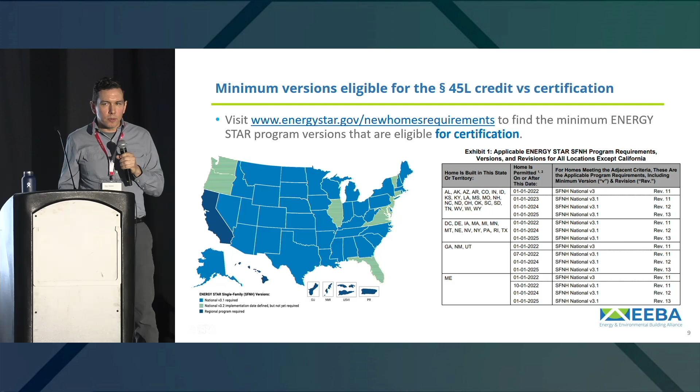Only 9 states, in fact, have an implementation date defined for National Version 3.2.

So, builders may find that the requirements for 45L are too stringent, saying that they're just not ready to step up to National Version 3.2 right now.

They may still be able to certify the homes to a lesser version because of our program requirements. And they should consider that, because there are lots of benefits to certification even if you're not getting the tax credit, like a market advantage, meeting corporate sustainability goals, or in a lot of cases these days, local utility incentives.

For, say, National 3.1. So that's a really important thing to distinguish, and I want you to leave with a clear understanding about the difference between the two.

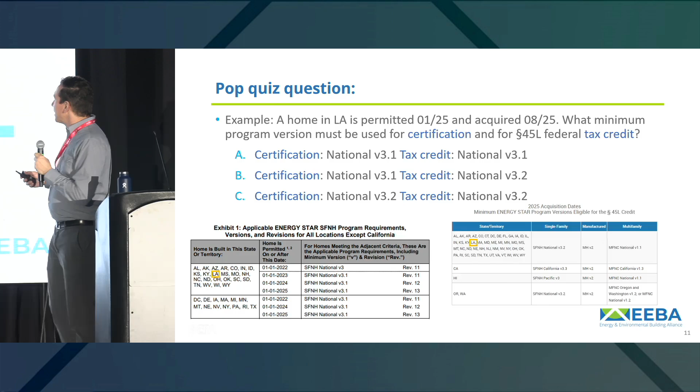Okay, so time for a pop quiz—one, to see if there's anyone still in the room since I'm blinded. So the question: let's say we have a home in Louisiana. It is permitted on January 1st of 2025. It's going to be acquired later that year, in August of 2025.

What's the minimum program version that has to be used for certification? And then what's the minimum program version that has to be used if you want the tax credit? Is it A, National Version 3.1 for certification and National Version 3.1 for the tax credit? Is it B, 3.1 for certification but 3.2 for the tax credit? Or is it C, version 3.2 for both certification and the tax credit?

I have a little cheat sheet, if you can read this, because I don't expect you to memorize all of our tables. On the left is the minimum version required for certification, and on the right is the table we were just looking at for the tax credit for acquisitions in 2025.

So who votes A? Okay. Who votes B? Excellent. And who votes C? Okay, I'm going to give everyone the benefit of the doubt that you guessed B. Looks like you got that right.

Again, some partners have been getting confused and tripped up about this point, so that's why I wanted to drive it home.

Now, I mentioned that we're getting very popular these days, so I just wanted to give you a quick update on participation. Our numbers have been growing the last couple of years, even before the tax credit came into existence.

But in 2023, the first year it went into effect under the new structure, we actually were close to certifying 200,000 homes in the ENERGY STAR program that year alone.

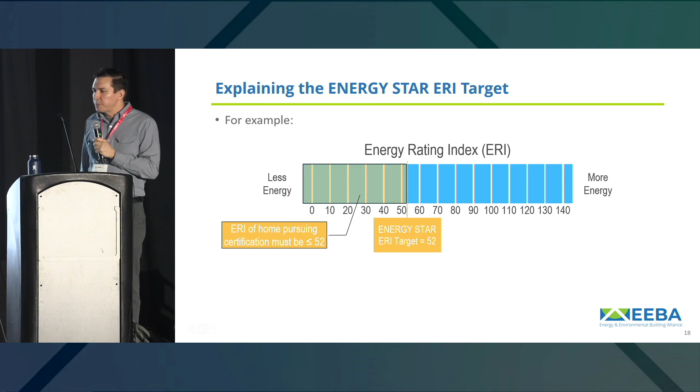The rating software then calculates the ERI score of that target home configured with those efficiency features, and that becomes the target that the builder can then mix and match to their heart's content until they meet or beat that target. So let's say you're modeling a home, you put it into software, you want to certify it, and it spits out for that particular house a target of 52. Then you have to mix and match upgrades until you meet or beat 52 using any features you'd like. None of the ENERGY STAR reference design features are mandatory, but if you don't use them, you'll have to pick other features instead to offset that until you hit the target.

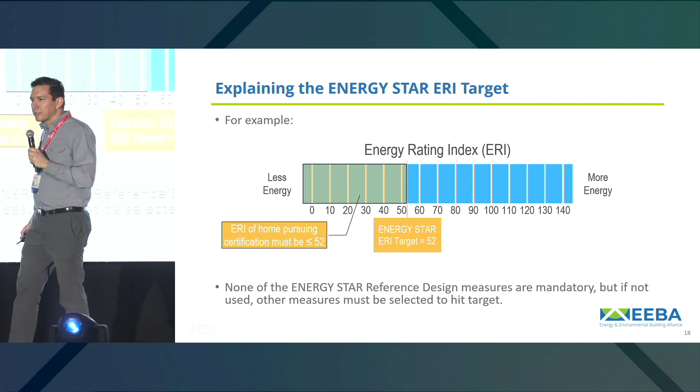So what are those targets? Well, that depends on the program version. National version 3.1, which is used in most parts of the country, the target is generally 55 to 65 for most homes. National 3.2 is being implemented in states that have adopted the 2021 IECC or an equally rigorous code. And as we discussed earlier, the tax credit is also going to require national 3.2 in most states beginning in 2025. So as more states adopt more rigorous codes, you'll see the expansion of national 3.2 just for certification, and if you want the tax credit, you're fast going to become friends with national 3.2—that's right around the corner. For national 3.2, the range is about 45 to 55 for most homes. There are some different performance targets defined in California, Pacific, and the Caribbean—that's my caveat there.

So what is going into that target of 45 to 55? Let's look at the envelope measures that go into the ENERGY STAR reference design for national 3.2. Those are shown on the screen. The cells highlighted in green are those that are an improvement over the 2021 IECC. We start off with an enclosure that's aligned with the prescriptive path of the 2021 IECC with insulation that's properly installed. We are configuring the homes with the ENERGY STAR product spec for windows and doors that was in effect at the time we were designing national 3.2.

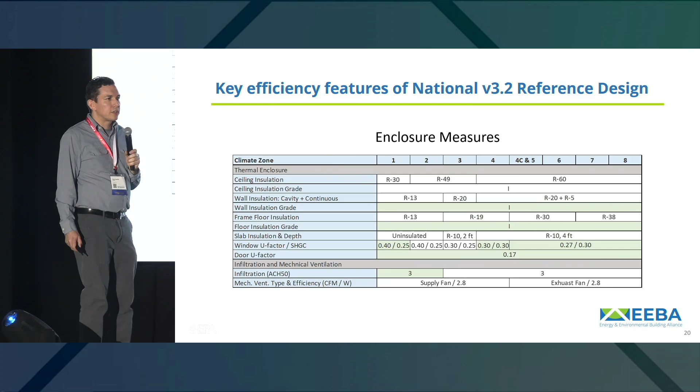All of the locations, all climate zones have 3 ACH50 infiltration, and we have a basic ventilation system, supply or exhaust, in each of those climate zones. Now let's look at the non-enclosure measures.

So we're configuring the ENERGY STAR reference design with the ENERGY STAR product spec for furnaces in most locations, with heat pumps and air conditioners that were basically aligned with the ENERGY STAR product spec for that category, again, when we were developing National 3.2. We have ducts located in conditioned space, 100%. We have a programmable thermostat.

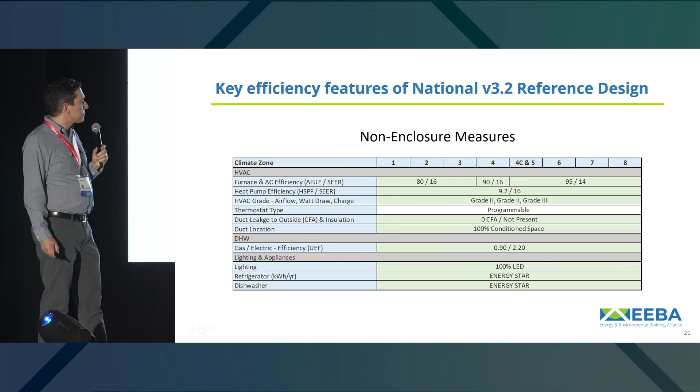We have 100% LED lighting, an ENERGY STAR refrigerator and dishwasher, and we have a high-efficiency water heater. So ENERGY STAR caliber, instant gas, or electric heat pump water heater. So again, that results in a target of about 45 to 55 for most homes.

Again, you don't have to use any of those ENERGY STAR reference design features if you don't want to, but a note of caution is that there are a couple of features that I think you're very likely going to have to use in order to hit that target. That includes the 2021 IECC insulation levels or equivalent. It includes ducts in conditioned space, and it includes an instant gas water heater or a heat pump water heater.

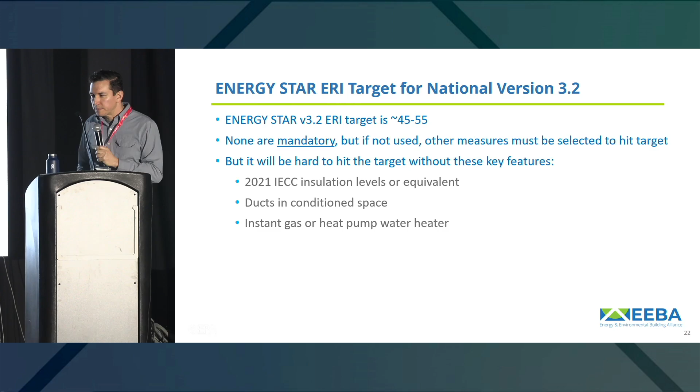So, partners will ask us, how much flexibility do I really have to hit that target and not use efficiency features in the reference design? I want to run through a couple of examples for you. I'm going to start off in a hot climate, climate zone 2. This happens to be a slab-on-grade 2,400 square foot home with electric heating.

And if you put that home into the software, you get a target of 50 for that particular house. And if you configure the rated home with the ENERGY STAR reference design features, lo and behold, you end up with an ERI score that's basically at that target, a score of 49. That makes sense. They're supposed to be sort of one and the same. So that would be a great way to start.

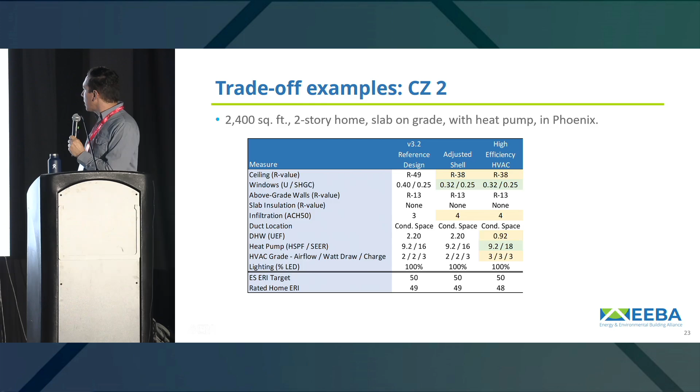Next up, I looked at high efficiency HVAC. And so in this case, I kept the enclosure that we were talking about. I upgraded to 18 SEER, and then I downgraded the water heater to an electric resistance water heater instead of a heat pump water heater. And I also took grade 3 for HVAC grading, so I wasn't even going to assess the HVAC installation. That still got me to a score of 48, so I had room to spare.

Next, I looked at a different water heater. I upgraded to an ENERGY STAR caliber heat pump water heater, 3.3 UEF, and that allowed me to stick with the grade 3 HVAC, stick with 4 ACH50 in that modified enclosure, and I still met the target.

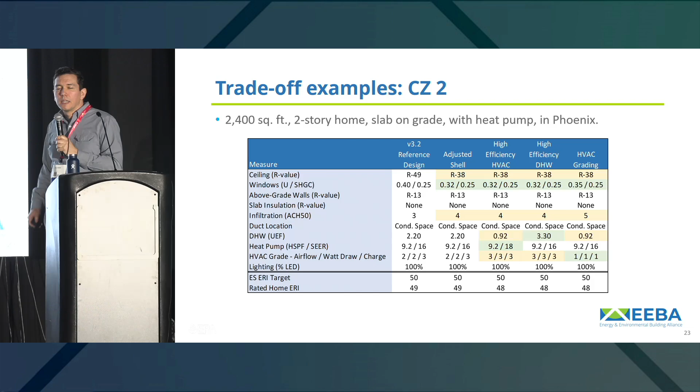And finally, I looked at using HVAC grading. I assumed grade 1 HVAC in this particular case, and that allowed me to back off to that electric resistance water heater, stick with the modified enclosure, and go all the way up to 5 ACH50, and I still hit the target.

So let's move on to a mixed climate, climate zone 4. So now it's a 2-story home, 2,400 square feet. It is a conditioned basement with a gas furnace in Baltimore. Again, if you just start off with the ENERGY STAR reference design features, for this particular house, the target is a 52, and you come in at a 51 for the rated home.

So first, I kind of modified the enclosure. Again, that's an area that most builders are interested in tweaking. And so I went from an R60 down to an R49 in the attic, and I went down to R21 high-density batt in the walls. And then to compensate for those downgrades, I improved the window U-factor down to 0.25.

That worked. So then I built off of that. I increased the infiltration to 3.5 ACH50, so I had a little wiggle room. I took the grade 3 HVAC grading default, and I improved, in this case, the furnace to 95 AFUE, a current ENERGY STAR gas furnace. That worked as well with room to spare.

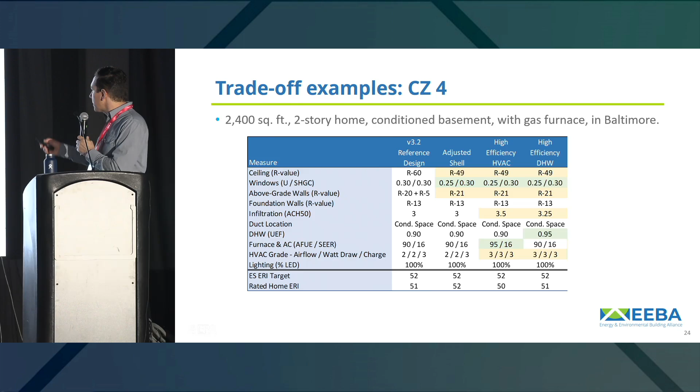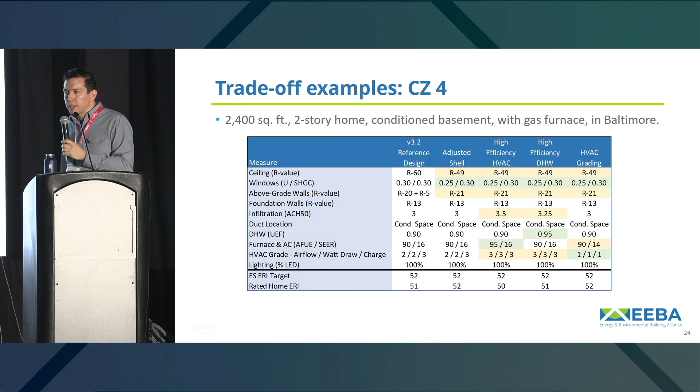Then I upgraded the water heater to an ENERGY STAR caliber water heater instead with that modified enclosure. Still took the grade 3 default for HVAC grading, and I was able to have a little wiggle room on the infiltration. That worked. And finally, I looked at the HVAC grading again, so grade 1. That allowed me to downgrade to a 14 SEER air conditioner and stick with that modified enclosure and still meet the target.

And finally, let me just do a quick cold climate example. So a 2,400 square foot home, 2-story, conditioned basement, gas furnace in St. Paul. Again, with the reference design features, you end up with a score of 49 versus a target of 50, so that works. The adjusted shell was pretty similar to Baltimore, going down to R49 in the attic and R21 in the walls, so no continuous insulation on the walls. You're compensating for that with 0.25 U-factor windows and also upgrading the foundation insulation to R21 in the walls.

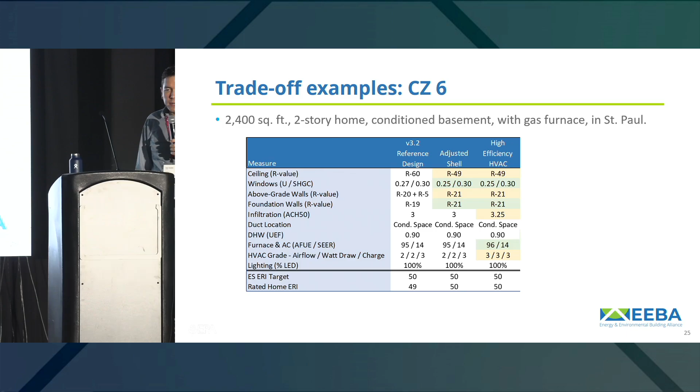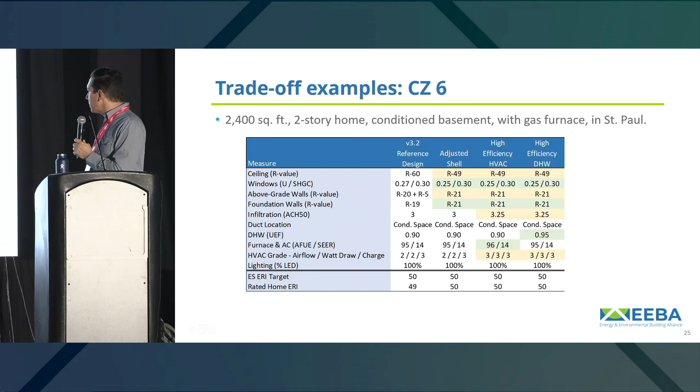Building on that, I went with a 96 AFUE furnace, so just a tweak to the furnace relative to the reference design. That allowed me to back off to default HVAC grading, grade 3, and a little wiggle room on the infiltration. Then I looked at the high efficiency water heater at 0.95. That gave me the ability to stick with grade 3 as well as still have some wiggle room on the infiltration. And finally, I was looking at grade 1 HVAC, and that allowed me to stick with the higher infiltration and the modified enclosure.

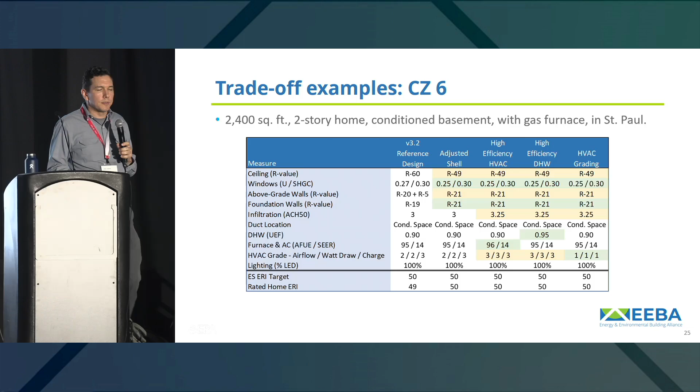So the takeaway here, hopefully, if you haven't done this exercise yet, is that there is a little bit of flexibility to mix and match measures here. You're probably just not going to be deviating in a couple of key areas from the ENERGY STAR reference design, like you're probably not going to be moving the ducts to a vented attic unless you're really going to pull out all the stops to compensate for that. So that's the first key change.

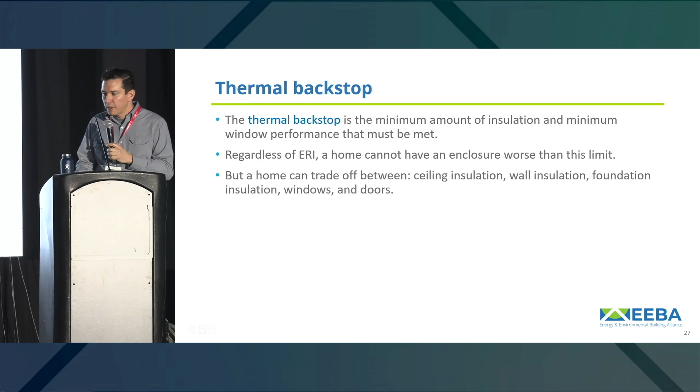The second key change between National 3.1 and National 3.2 is a more stringent thermal backstop. So what do we mean by that? Well, the thermal backstop is the minimum amount of insulation and the minimum window performance that you have to include in the home for it to be certified. So you could have an ERI score of 0, highly efficient, but if you're not meeting the thermal backstop, then you can't certify the home. We've actually always had that in our program, but with National version 3.2, it is more stringent.

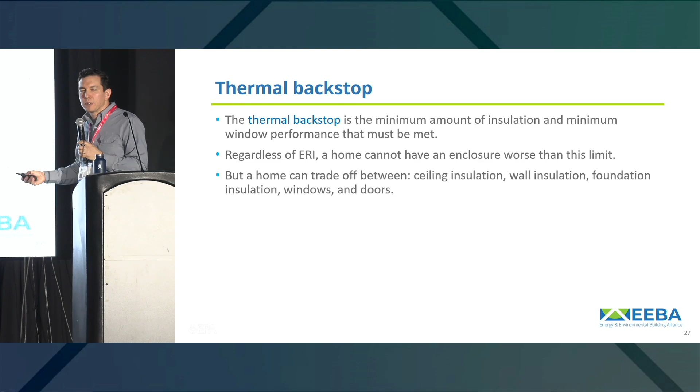And with the thermal backstop, that means that you are allowed to trade off insulation levels between the ceiling, the walls, and the foundation, as well as the windows and doors. But you can't compensate with, say, an 18 SEER air conditioner. Okay, so we can quantify that thermal backstop. It's basically the area-weighted U-factor of the entire enclosure. And you'll often see that described as the building UA value. You're literally multiplying the U-factor of a component by the area of that component.

I know that's a little bit wonky, something that a lot of people don't have intuition on yet, completely understandable. So I just wanted to run you through a couple of quick examples to help build that intuition. I happened to do these calculations on a 2,400 square foot home with a 15% window area to floor area ratio. Your results would vary a little bit if you did a different house type. So I want to start off with windows. When we say UA, you're literally multiplying 0.35 U-factor by 360 square feet of area, and you get the UA value of 126.

And as you improve that window from 0.35 to 0.3 and 0.3 down to 0.25, your UA becomes lower, which is better. Now I just want you to pay attention to how much that UA is changing as you improve that window. It's going down by about 18, which is actually quite a bit because windows are unfortunately relatively poor insulators. So now let's move over to walls. You're doing the exact same calculation. The U-factor of the wall times the area of the wall will give you the UA value. As you improve the insulation, the UA value goes down.

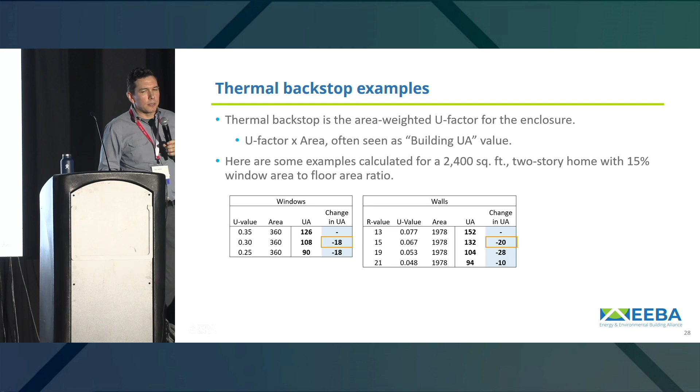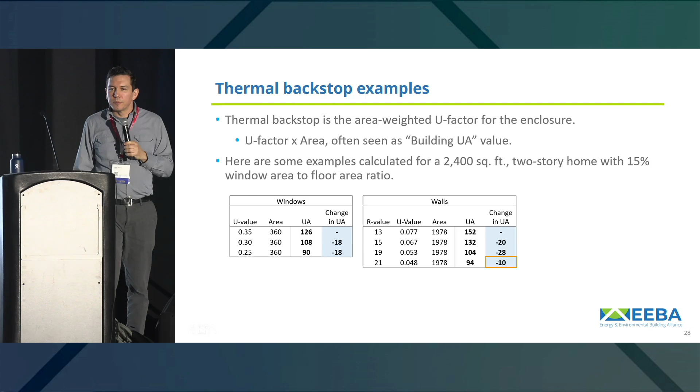I just want you to pay attention to how much that's changing. So improving your walls from R13 to R15 has about the same impact on the UA as improving your windows from 0.35 to 0.3. And I'll also point out that as you go from R19 to R21, the UA value improvement is about half of what you got from going from R13 to R15. So diminishing returns as the insulation level gets higher.

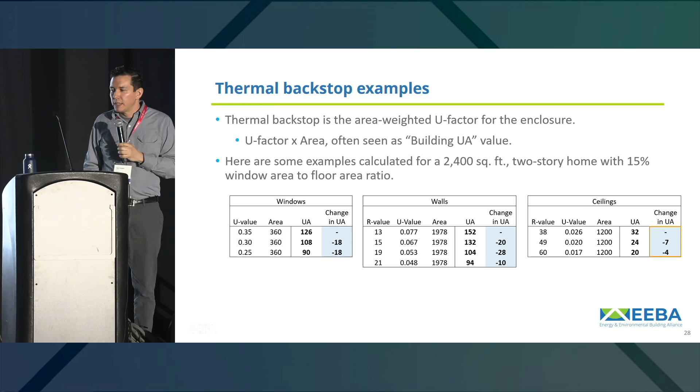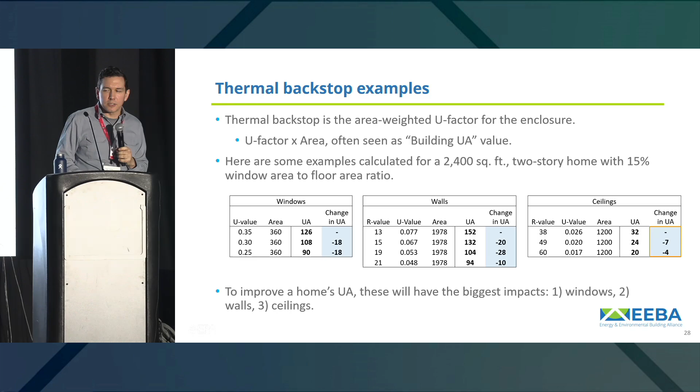And finally, let's look at ceilings, which are relatively highly insulated to begin with. You can see that the change in UA as you improve that insulation level is really quite small. So the key takeaway of this slide, if that was too much in the weeds for you, that is fine. The takeaway here is if you want to improve the UA of your house, you'll get the biggest bang for your buck by starting with the windows and improving those, then the walls, and then the ceiling.

Okay, so what are the thermal backstops for ENERGY STAR? Again, that depends on the version. For National version 3.1, that's in effect in most states in the country, it is 100% of the UA value of the 2009 IECC prescriptive path. And some partners didn't even know that existed because it was so easy to meet.

With National version 3.2, it's more stringent. It's based on the UA value of the 2021 IECC prescriptive path. For homes that are permitted before January 1st of 2025 and certified using National 3.2, it's 105% of that UA value. And then for homes that are permitted on or after January of 2025, it drops down to 100% of that UA value.

Now, if you're not familiar with the requirements in the 2021 IECC prescriptive path, I put those on the screen here, along with the 2009 IECC for comparison. And I've shaded in green the differences. So I would summarize those changes into 3 categories here. So climate zones 1 and 2, I would call modest. Sure, the ceiling insulation is higher. The windows are a little bit better than the 2009 IECC, but it's almost harder to buy windows that are worse than that these days. So that's why I say that's a pretty modest change.

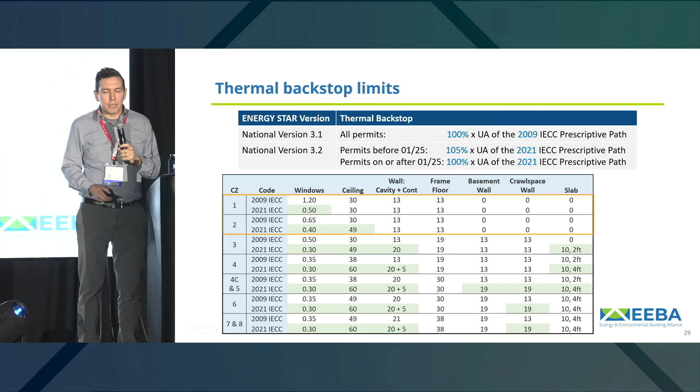The second category is climate zones 5 through 8. I would call that a moderate change. In fact, the 2021 IECC has basically the same insulation requirements in climate zones 5 through 8. It's all identical except for some differences in floor insulation values. So you're going up to R60, which is a big deal, but it's from a relatively high level to begin with. The windows are basically what most of our partners are probably using today anyways. The wall insulation is higher for sure, but it's also starting from a relatively high level of insulation to begin with. And then some modest improvements to the foundation.

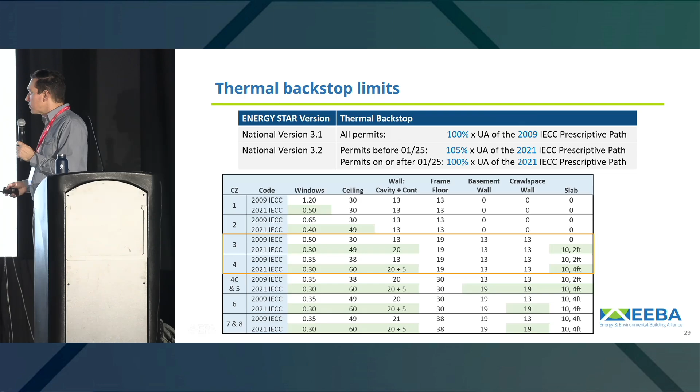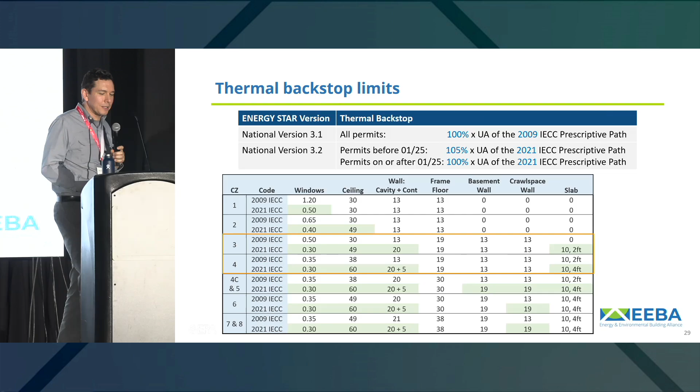And the last category, climate zones 3 and 4, is what I call major. And I call it major because the wall insulation requires a change in assembly type. You're really getting to 2x6 construction there. And slab insulation is introduced for the first time in climate zone 3. So if that's kind of freaking you out, that's okay. We have the UA approach to give you some flexibility. So let me calm your nerves a little bit by talking about those trade-offs.

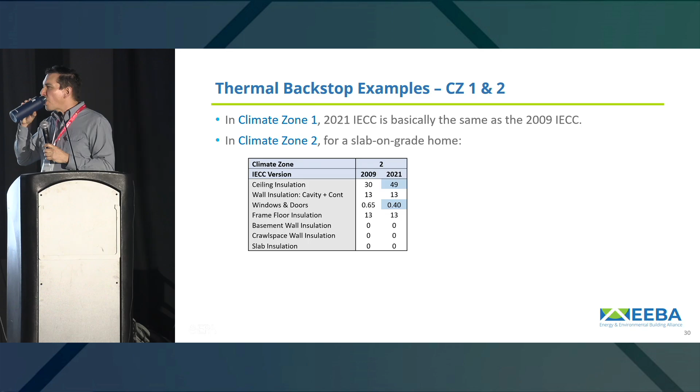So let me give you some examples here. I'm going to start off with that modest group. Climate zone 1, I'm not even going to show you an example because, again, 2021 IECC is, for all intents and purposes, the same as the 2009 IECC. For climate zone 2, the big change, again, is the ceiling insulation, and the windows have gotten a little bit better. So if you can just put those things in, you calculate the UA for the home, you're going to find that it meets the 2021 IECC UA. But let's say that you're not comfortable with that, you want some other options.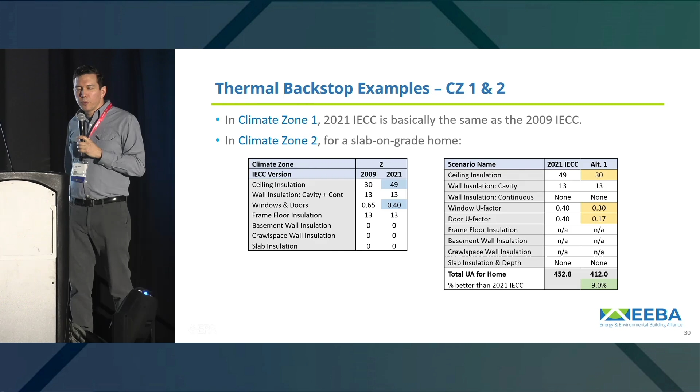So in this case, I downgraded from R49 all the way down to R30. That's a big change. And to compensate for that, I improved the windows from 0.4 to 0.3, and I added insulated doors. And you see the UA value down there is not just meeting the 2021 IECC, it's exceeding it by 9%. It's 9% better. So you can see that on the left, it's 452.8. You end up with 412 on the right. It's lower, it's better. So you got room to spare there. So lots of flexibility.

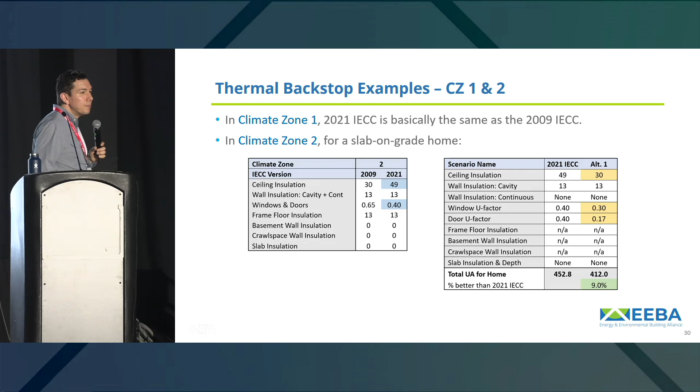That's why I say I don't think most partners are going to have challenges meeting the backstop at climate zone 1 and 2. Okay, let's move on to the moderates category.

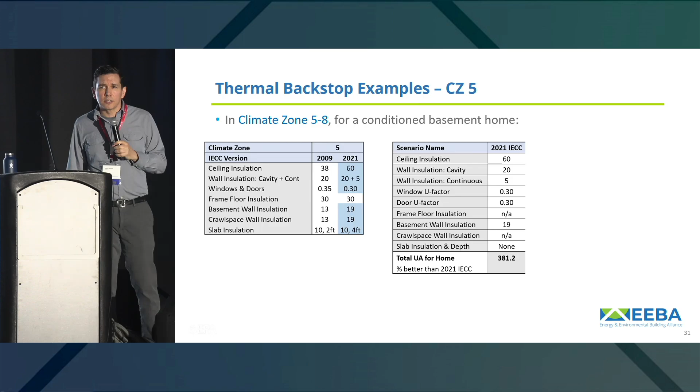I'm going to use climate zone 5 as an example, representative of 5 through 8. Changes almost across the board: ceiling insulation, wall insulation, window improvement, and foundation insulation improvement. So again, you could just go with that and you'd be good to go, right? That's going to meet the UA target by default.

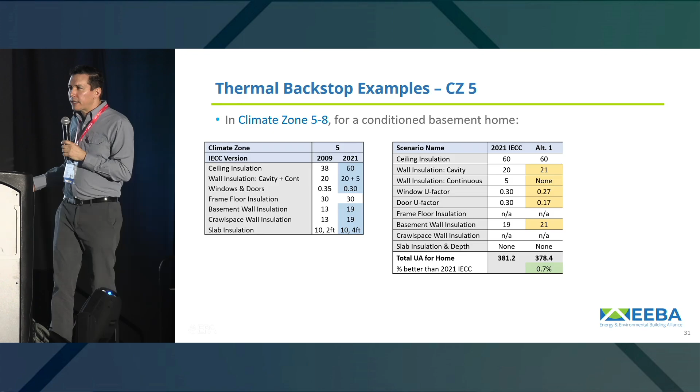But let's say you want some other options. Let's say that you don't want to use continuous insulation on your walls—that's something we hear a lot from builders. So I'm going to just go with a high density batt in the wall cavity, R21, and skip the continuous wall insulation. To compensate, I'm going to improve the window U factor modestly to 0.27. I'm going to use insulated doors, and I'm going to use that same high-density batt in the foundation. That also allows you to squeak by without any continuous insulation on the walls.

Okay, well, let's say that R60 is a step too far. You want to drop back down to R49, but you're willing to max out the cavity insulation to R23. So no continuous insulation on the walls, but you're packing the 2x6 wall with insulation. You apply the same window and door upgrade, and you get there as well.

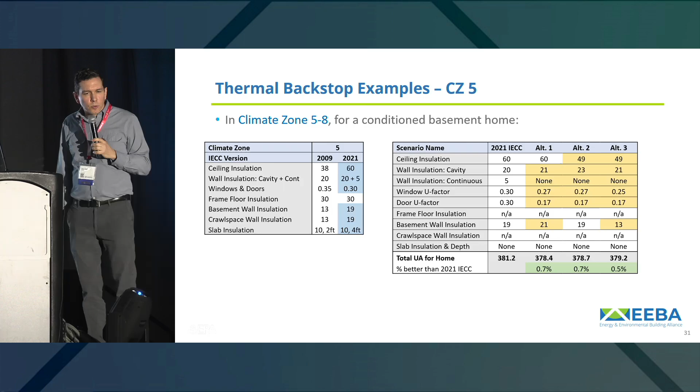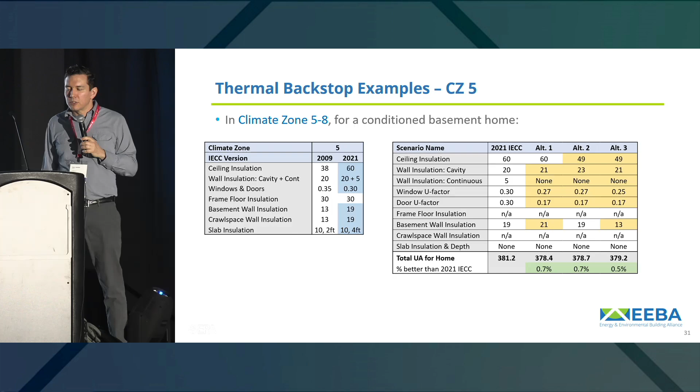And then finally, let's say that you invest in a really good U-factor window—you go down to 0.25. What does that give you in terms of flexibility? You can stick with R49 in the ceiling, which is pretty conventional in the north these days. You can stick with R21 batts in the wall, and you can actually downgrade your foundation wall insulation to R13, and you still hit the target. So you can see how powerful that good window is in meeting this.

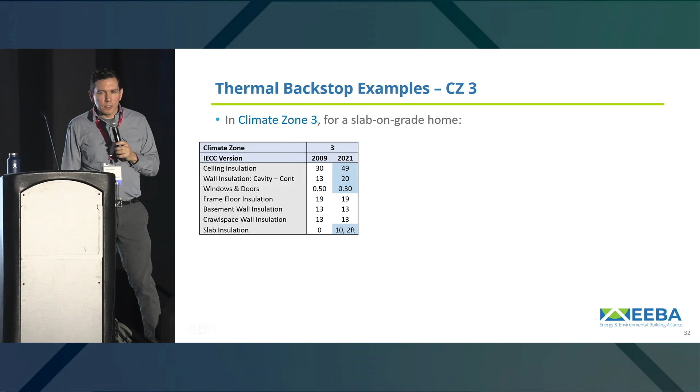Okay, let's move on to the most difficult category. Start with climate zone 3. I modeled a slab-on-grade home. Here's where you have an increase in the ceiling insulation, a change in the wall assembly, and a change in the slab insulation. Again, if you do that, kudos to you, you're good to go.

Let's say that you can stick with the R49, but you don't want to go to 2x6. So one alternative that we've seen taking off in Climate Zone 3, like in Dallas, for example, is sticking with the 2x4 wall with a high-density batt, but adding a little bit of continuous insulation, R3. If you pair that with a modest improvement to your window U factor, 0.28, and insulated doors, you can put in just a little bit of slab insulation and hit the target. So that would be one way to go.

Let's say instead you're willing to go to 2x6 and you put in a high-density batt. You stick with R49 in the ceiling. You can have an even smaller improvement to the window, and you can get rid of the slab insulation altogether, and you'll also be good.

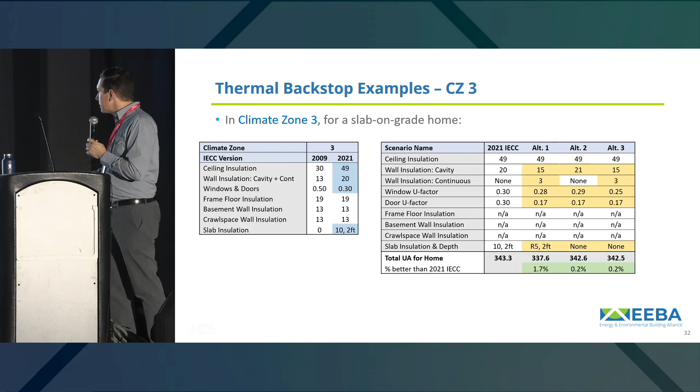Or let's look at the window example again. Let's say that you're willing to invest in 0.25 U factor windows. That allows you to go back to the 2x4 assembly with a little bit of continuous insulation and no slab insulation at all, and you can still hit the UA target.

And finally, let's look at Climate Zone 4. Slabs and basements are common there. I went with a slab example because that tends to be a little bit harder to hit the UA target. So again, improvements to the ceiling insulation, the wall insulation, the windows, and a little bit of a tick up in the slab insulation. If you can do that, you're good to go.

Let's say you're willing to stick with the R60, but you don't want to do continuous insulation. Well, if you max out that wall cavity at R23, and you make a modest improvement in your windows, then you're good to go.

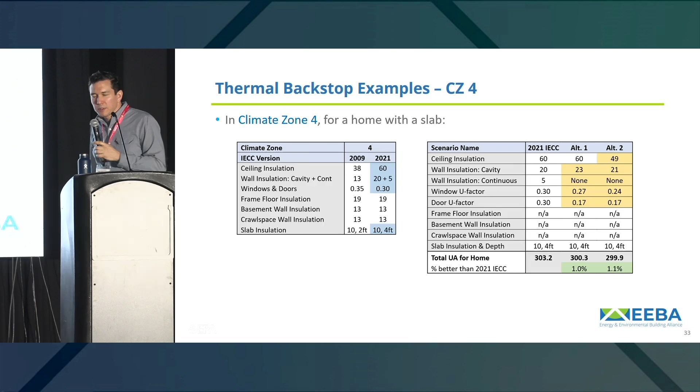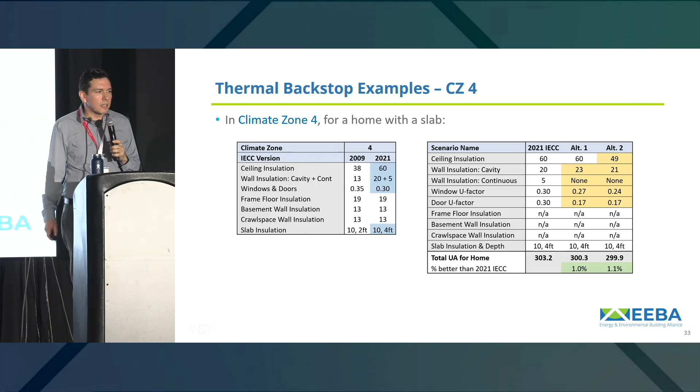Next, if you want to stick with R49, if R60 is just a step too far, then you can do that. You want to stick with R21 in the walls, okay? Well, then if you really double down on those window U factors, in this case down to 0.24, that would also allow you to hit the target.

So with most of these examples, I ended my scenarios with an improved window U factor. And I think while these may be sort of uncommon today in terms of your experience as a builder or rater, we think these sorts of products are going to become a lot more common in the next few years. That's because there's a new specification that came out last October for ENERGY STAR residential windows, doors, and skylights.

The reason I think that is a big deal is that back in 2020, the last year we have market data, 84% of windows sold in the United States, not just residential new construction but existing market as well, were ENERGY STAR certified. So window manufacturers were largely lining up to meet that ENERGY STAR product spec.

Now this new spec is much more stringent, but I expect the industry to slowly follow suit with more offerings that meet these new requirements. This is the new product spec as of last October. I'll call out two regions: the yellow region is basically Climate Zone 4, where a window with a U factor of 0.25 or better is required to be labeled ENERGY STAR. In the northern half of the country, the blue region, you're required to have a U factor of 0.22 to 0.26, depending on solar heat gain, for that product to be ENERGY STAR labeled. So the whole industry is slowly gearing up to have more offerings around this.

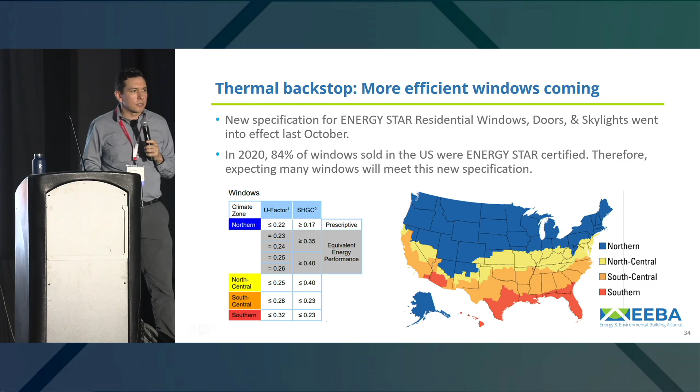In fact, we've been talking with our product expert at ENERGY STAR on Windows, and he educated me. He said you can get down to 0.24 and 0.25 U factor with off-the-shelf technologies and a double pane assembly. So we're not asking for triple pane in the scenarios I was looking at, though if you're interested in triple panes, I think those will become even more common and affordable. There was a great pre-conference session yesterday between window manufacturers and builders about the need for more high-performance window products.

Okay, let's do a quick knowledge test. What's the key difference between National 3.1 and National 3.2? Is it a more stringent ERI target? Is it a more stringent ERI target and a new thermal backstop? Or is it battery storage in every home? A, B, and C—who's going to be the wiseacre? Yeah, pretty compliant crowd. All right, very good.

What's the typical range of ERI targets for National 3.2? Is it about 0 to 10 for every house? Is it exactly 50 for every home, or is it about 45 to 55? A, B, C. Very good. I wish I could hand out gold stickers or gold stars or coffee or something for getting that right. And last question.

Which homes have to meet a thermal backstop equal to 100% of the 2021 IECC UA? This is a bit of a trickier question. All homes certified to National 3.2? All homes certified to 3.2 if permitted after January 1st, 2025? Or is it all homes, regardless of the version certified under, if permitted after January 2025? So A, B, and then C.

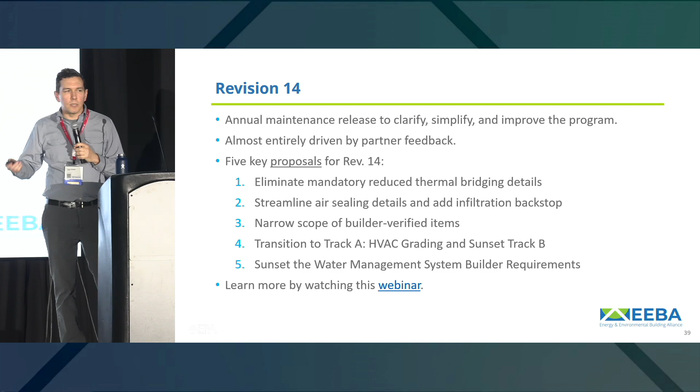If you didn't hear about this and want to learn more, you can watch a webinar at this link when you get the slides. This goes into a lot more detail. Again, we solicited feedback over the summer about these proposals. We're now processing all that feedback we got from partners, and we'll decide whether to proceed with each of these 5 proposals. That will show up in the form of Rev 14 when we release it, aiming for the end of the year.

Moving on, National Version 3.3. So yes, we are in fact working on the next national version of the program. Why would we do that to ourselves and to you? It's because the 2024 IECC has been finalized and published, and that is more stringent than the 2021 IECC from a casual read. So we are now working on the next national version of our program. The key goal is to maintain 10% savings or more relative to that latest model code. We are expecting a comment period later this fall on that proposal, and we anticipate that will be finalized by the end of this calendar year. It's worth noting that the earliest that could go into effect for certification, the earliest we'd require that to be used for certification in a state, would be January of 2027.

So a little ways off before you have to even contemplate making use of it. First, we have to finalize it, but that is something we're actively working on back at headquarters.

And finally, for our California partners, we are also working on the next regional version of the program in that state. That's in response to their just finalized 2025 edition of the California State Code. We're actually kicking off a comment period next week on that, again, to maintain 10% savings above the latest code. The good news for our builder partners in California is that the efficiency features of the code have more or less leveled off at this point, and the state has turned their attention more to the electrification side of things. So in terms of energy efficiency, we anticipate this new version is going to have roughly the same stringency as the prior version. And again, we're starting a comment period next week, and the earliest possible that could be required for certification would also be January of 2027.

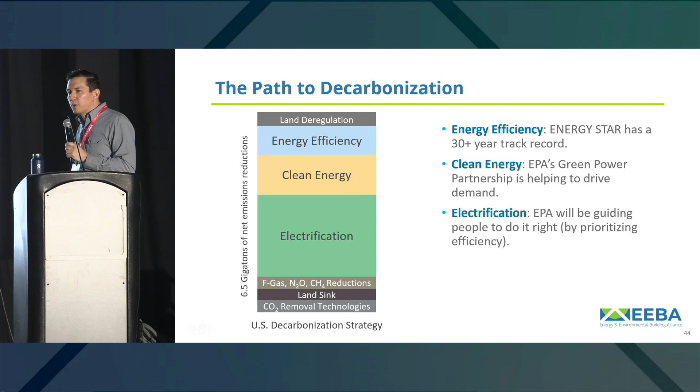So let me start with a little bit of context. As you probably know, underlying all of the ENERGY STAR program is our goal to reduce greenhouse gases. If you talk to experts about how to continue making progress on those goals—for example, the Department of State's long-term strategy for greenhouse gas reductions—it really comes down to 3 strategies for making the most impact: energy efficiency, clean energy, and electrification. With ENERGY STAR, historically speaking, we focused on that first one, energy efficiency. With ENERGY STAR NextGen, for the first time, we're introducing elements of electrification into the program to continue advancing our environmental goals.

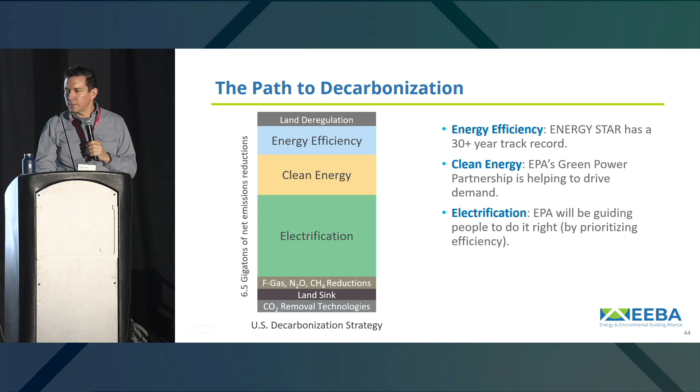And the reason electrification is so important is because electricity is getting cleaner every year. Renewable energy generation has just about doubled in the last dozen years, and the Energy Information Administration expects renewable energy to increase 5-fold in the next few decades. As a result, electricity has already started to become much more efficient, largely driven by changes in policy at the local, state, and federal level. For example, the Inflation Reduction Act, passed between 2022 and 2023, caused a difference in projections in the annual energy outlook produced by the Energy Information Administration—dropping the projected emissions rate of electricity by nearly 50% from that policy change alone. So again, there are lots of policies driving electricity to be cleaner and cleaner going forward.

Okay, so for ENERGY STAR NextGen, the program builds on the successful foundation that ENERGY STAR created, our core program. It helps define the key elements and technologies needed in new homes and apartments to drive emissions down significantly, all in a national platform.

We believe that we have a really important role to play in that process as ENERGY STAR, to help everyone do it in an effective, meaningful way and continue to deliver the benefits that consumers have expected from our program all along. So not just energy efficiency, but also comfort, durability, and indoor air quality.

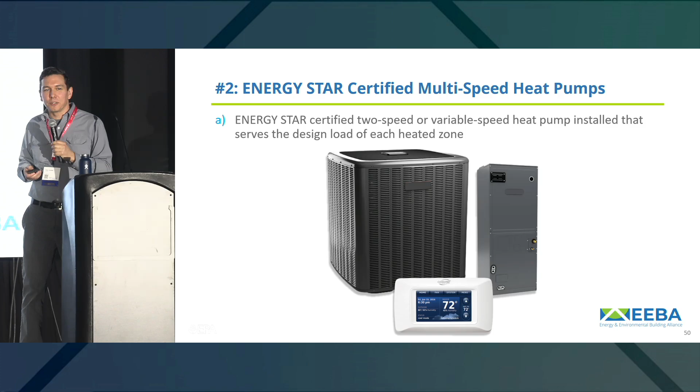Now, multi-stage and variable speed technology is a really important amenity. It's not just unlocking higher efficiency, but it's also offering things like more consistent temperatures throughout the home, and these systems typically operate more quietly. As someone who lives in a house where the return is right next to my head in the living room, I can tell you that that quietness is something you can definitely market to homeowners. So we think that's pretty great.

There are a couple other components that go along with this heat pump. The first is that if you're installing this in climate zone 5 through 8, that heat pump also has to meet EPA's cold climate criteria. That basically ensures the heat pump is going to deliver the sufficient amount of heating, and at an efficiency you'd expect, at very low outdoor temperatures typical of those climate zones. Now, you may not know this if you haven't been following heat pump technology, but heat pumps have been installed in cold climates in the US for at least the last decade, if not longer.

We pulled out some quotes here from Efficiency Maine. They were asking for customer testimonials from a retrofit project where they were putting heat pumps into existing homes in Maine, and the customers had a really great experience. They maintained their comfort and lowered their utility bills, even during a brutal cold snap in the middle of winter. So this technology works, it's being used today, and it can be used in ENERGY STAR NextGen quite successfully. You don't have to entirely take our word for it, though.

That's because we allow dual fuel systems in ENERGY STAR NextGen. The primary heating and cooling system has to be a heat pump, but you are allowed to put a gas furnace backup or other non-electric backup in and still certify the house.

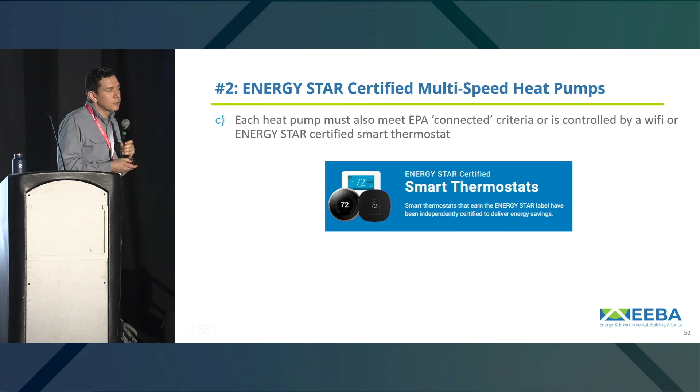The next component that goes along with the air source heat pump requirement is that they have to meet EPA's connected criteria, or be controlled by a Wi-Fi enabled thermostat, like an ENERGY STAR smart thermostat. For a 2-stage heat pump, that's a great option. For a variable speed heat pump, you often need to pair that with an OEM or manufacturer-specific controller to enable all the functionality of that sophisticated equipment. So that might be a case where you default to just a Wi-Fi enabled thermostat to satisfy this requirement.

And the web presentation wouldn't be complete without mentioning HVAC grading. That's the fourth component of air source heat pumps: you have to properly install these systems, meaning Grade 1 HVAC grading per ANSI/RESNET/ACCA/ICC 310, the HVAC grading standard. If you're not aware of that standard, I'm surprised, but it's something I've been talking about ad nauseum for the last 5 years or more.

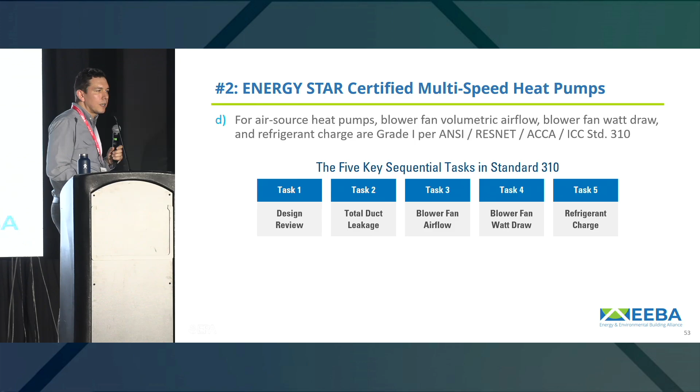It's 5 tasks completed in sequence: a design review and a total duct leakage test, which our partners are basically doing today anyway, and then 3 relatively new field tasks—measuring the total airflow through the HVAC system, the blower fan watt draw, and assessing the refrigerant charge. Just doing those 5 tasks gives you a wealth of information about how the system has been installed, and makes sure you're reducing risk to the builder and that they're really getting what they paid for.

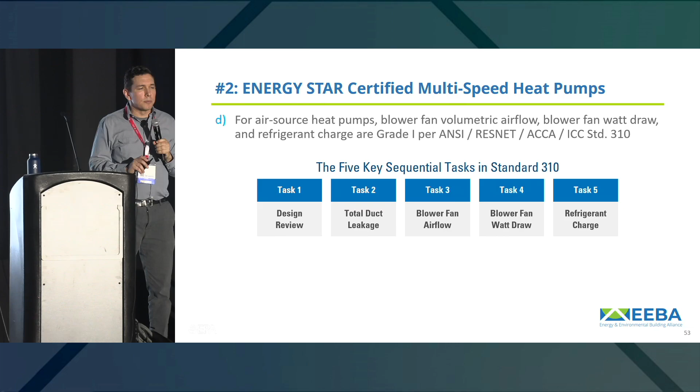So this is a really important component of NextGen. We like to say that ENERGY STAR NextGen homes and apartments allow you to take control of your comfort with a quiet and responsive heating and cooling system. We think this is a really marketable feature for homeowners, and we think it's catching on.

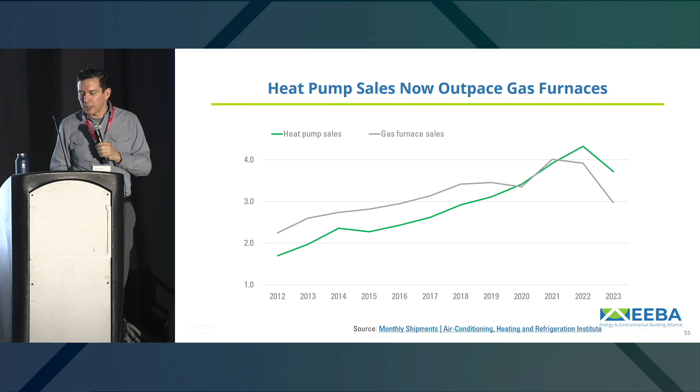So this is pretty fascinating. In 2022, for the first time, the sales of heat pumps outpaced the sales of gas furnaces in the US. That only accelerated in 2023. I was looking at the numbers before the conference, and that's continuing into 2024 as well. So we think that's a really compelling value message.

Okay, on to the next requirement: an ENERGY STAR certified heat pump water heater that meets EPA's connected criteria. Heat pump water heaters, if you haven't heard, can be up to 4 times as efficient as standard electric technology. They can save homeowners hundreds of dollars per year, and they're really amazing technology to reduce one of the biggest end uses in a home.

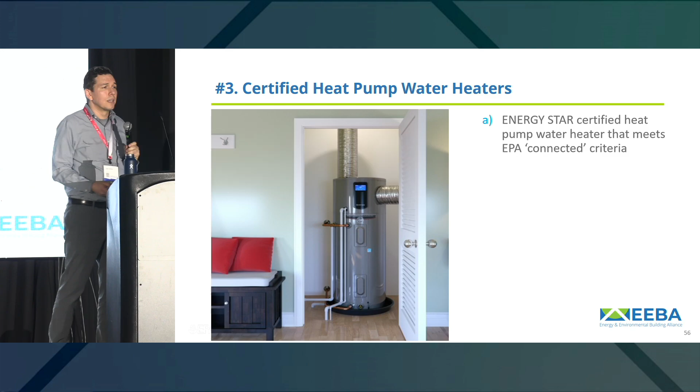Now, the small and mighty ENERGY STAR team back at home has installed 3 or 4 of these in our own houses. We've had great luck—they produce enough hot water, they're quiet, and they haven't had any problems. The biggest change is they produce a little bit of cool air around the heat pump, and that's really not a big deal.

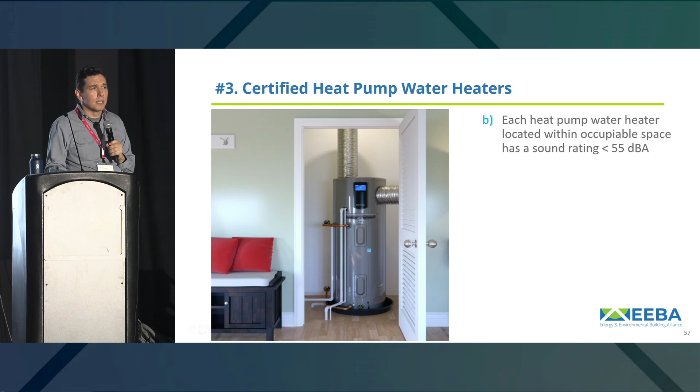So a couple of things we pair with that. Each heat pump water heater has to be relatively quiet—it has to have a sound rating of 55 decibels or less if it's installed in occupiable space, so you don't annoy the homeowner. Pretty straightforward, and more of these products are meeting and exceeding this requirement. They're becoming quieter every year.

Now, of all the requirements in ENERGY STAR NextGen, probably the heat pump water heater is the one that will take the most work to plan for. And that's because you have to find a space in the home that has enough air surrounding it to extract heat from. And so one thing we've been starting to advise our partners, even if you have no interest in NextGen, start thinking about this when you are working on an update to your plans.

Figure out where in the future you'd like to be dropping in a heat pump water heater so you can design around that today. Even if you don't install the heat pump water heater for 5 more years, when the time comes to install that, you want to know where you're going to put it in. And you only have so many opportunities to make those major architectural changes to your plans.

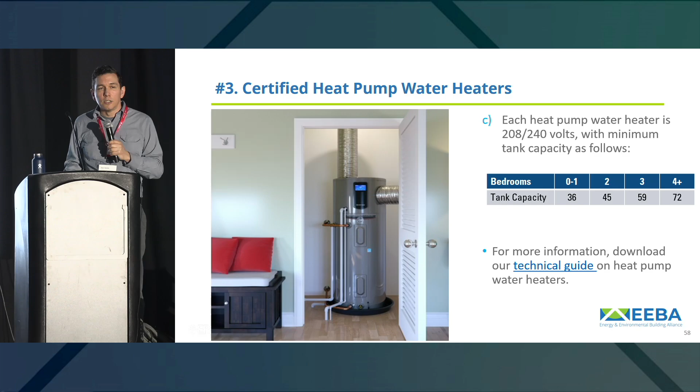So plan ahead. We actually have a technical guide that's available at this link to help people prepare to design and install heat pump water heaters. That's a new resource for our partners, and I encourage you to download that.

Okay, on to the 4th category, so 4 out of 5. It's electric cooking. So that means an electric cooktop and an electric oven. Right now, we recommend but don't require that technology be induction. Induction offers all sorts of great consumer amenities.

It boils water in half the time of gas. Its surfaces are cooler to the touch. That reduces burn risks. It makes it easier to clean up. It's a flat surface that gives you more workspace in the kitchen.

There are tons of features to sell to consumers around induction, and that's why there's been a huge increase in the investment of induction cooktops and the availability of induction cooktops, just not enough yet where we'd like it to be. And that's why it's an option instead of a requirement to use the induction side of it. But we think that is going to come in the future.

We've already seen prices drop at the low end by a couple hundred dollars just in the last few years for induction cooktops, and the market is rapidly growing here. So if you include induction, there's lots that you can market to the consumer.

The other thing that we're tracking is that for the first time last year, our products team created an ENERGY STAR specification for electric cooktops. So that includes ENERGY STAR induction cooktops and ENERGY STAR plain old electric cooktops. So we're tracking the uptake of that particular product to see how many products are certified, and the ENERGY STAR product designation might become part of NextGen in the future.

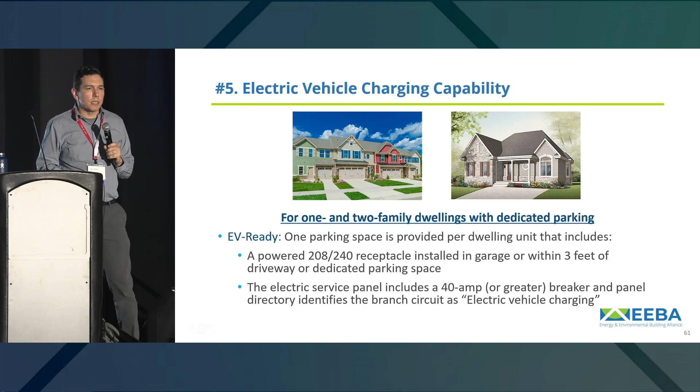What do we mean by EV-ready? It's a 208/240 volt receptacle in the garage or within 3 feet of the parking space. And it has to be connected to a 40 amp circuit that is energized and is tagged as being for EV charging purposes. So basically you have a big plug in the garage ready to go. If the homeowner buys an EV, they can just plug it in and start charging at level 2.

Now, for multifamily buildings, obviously it's a little bit more complex, or if you have a single family development where you don't have dedicated parking spots right next to the home, you maybe have like a surface lot where you have a collection of parking spots for the owners. That's where the other requirements come in.